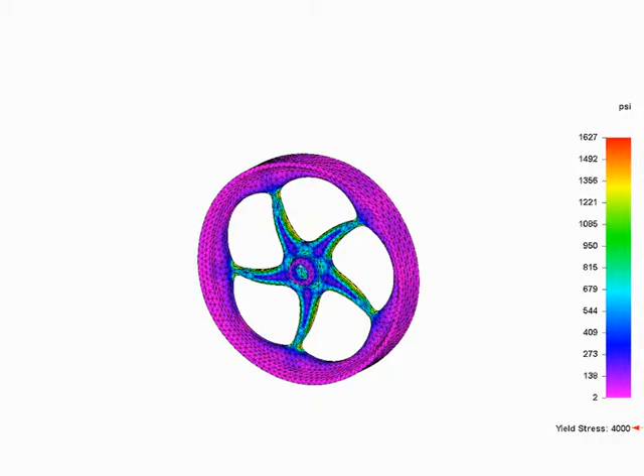Solid Edge ST6 introduces design optimization, providing designers with the ability to set up what-if operational scenarios to automatically predict how a part will react to specified loading conditions. This innovative functionality helps to develop safe and reliable products at minimal costs.

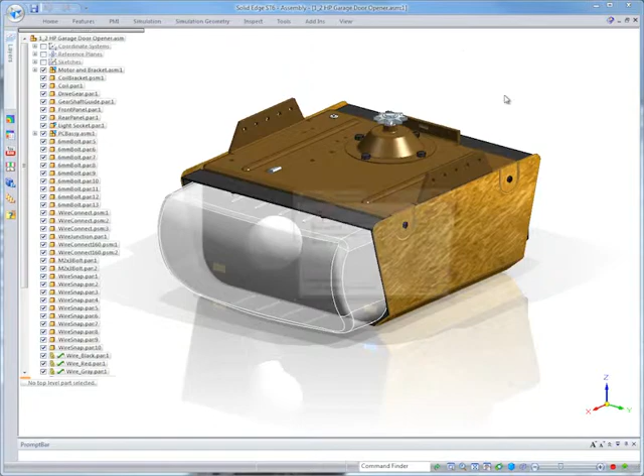In this demonstration, we'll study a sheet metal bracket which supports the motor and gearing for a garage door opener. We'll open the 5mm thick sheet metal bracket in Solid Edge and view the results of a previous analysis. A 0.19mm deflection of the bottom flange was computed, evidence the bracket is very stiff and therefore over-designed within the defined loading conditions in sheet metal gauge.

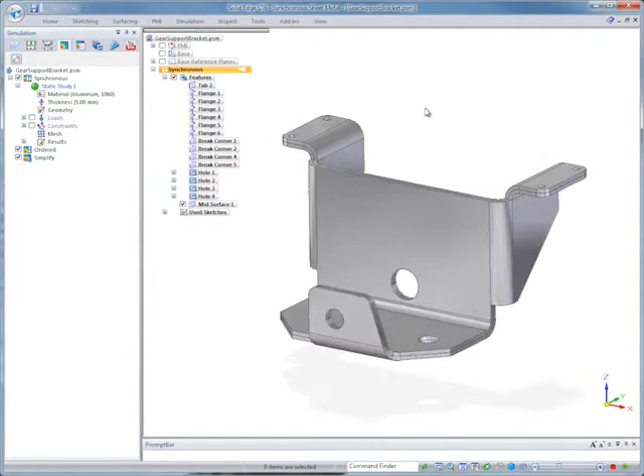Our goal here is to minimize the bracket's material while still providing a safe product. For the existing simulation study, we'll use the new optimization option to set our design objective. In this case, we wish to minimize the mass of the bracket while keeping the deflection less than or equal to 1 mm. We'll restrict the thickness of the metal to a range between 1 and 5 mm.

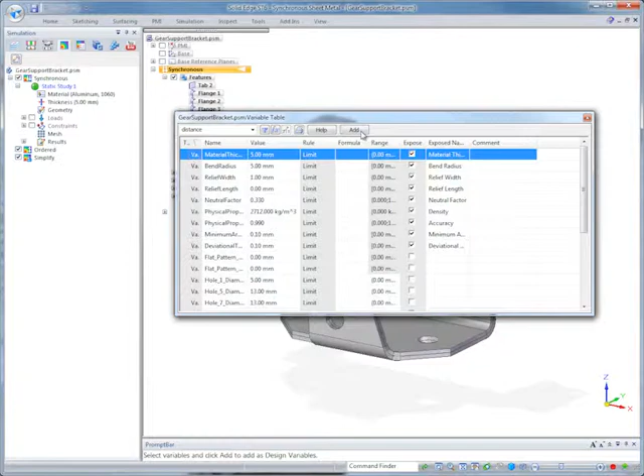Watch as Solid Edge iterates on various thickness values within that range. We could do this manually by changing the sheet metal gauge, solving the study, looking at the results, then repeating this process until we have an acceptable solution. But this could take hours to perform. With the optimization functionality, convergence on a solution takes seconds.

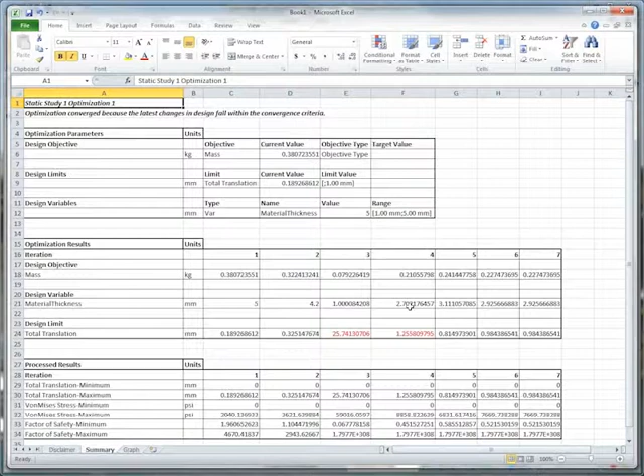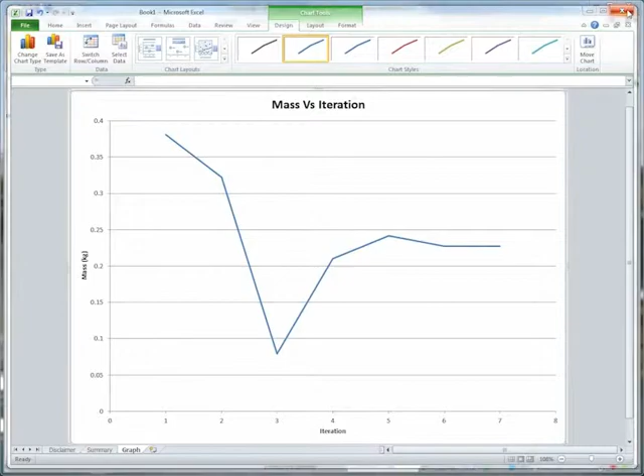When we review the results section of the summary spreadsheet, we can see that Solid Edge converged on a thickness of 2.93 mm, resulting in a deflection less than 1 mm. This convergence on thickness can be confirmed by looking at the graph of the bracket's mass iterations. Notice how the graph levels out in the final 2 of the 7 computations.

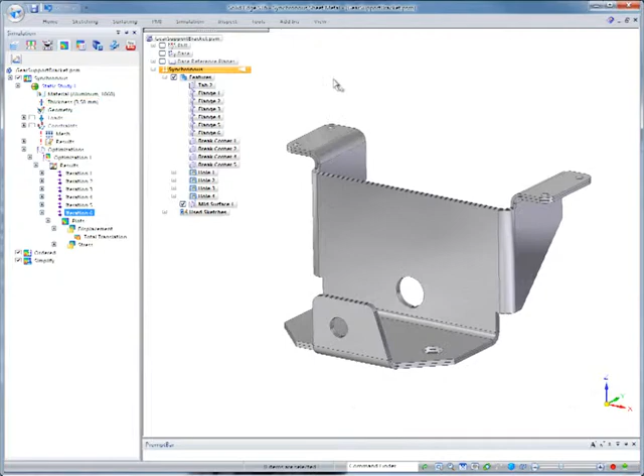Now that we have an actual thickness of 2.93 mm, which represents a minimized but safe amount of material, we can use that to guide selection of an available sheet metal gauge. As we search the Solid Edge material table for a thickness gauge, the closest we'll find is 12 gauge, or actual thickness of 2.77 mm.

For purposes of safety, we'll move up to a 10 gauge sheet metal gauge, which represents an actual 3.58 mm thickness. We'll apply that to the model, resolve the study, and find that this new thickness results in a deflection of 0.54 mm, meeting our requirements to stay below 1 mm.

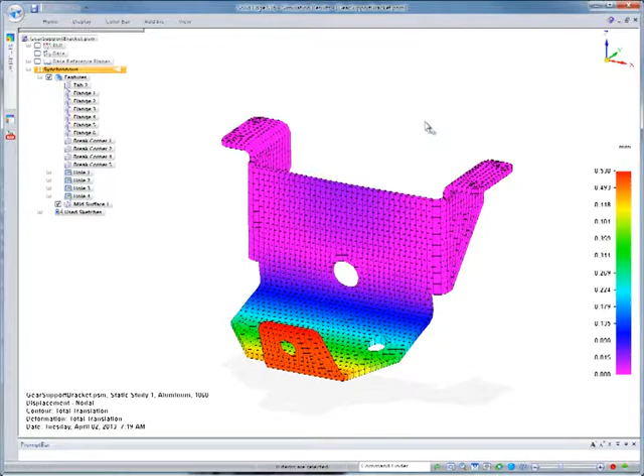With the inclusion of design optimization tools in Solid Edge ST6 simulation, designers can reduce their material and engineering costs with confidence that safety and reliability goals are being met, all before building a prototype.